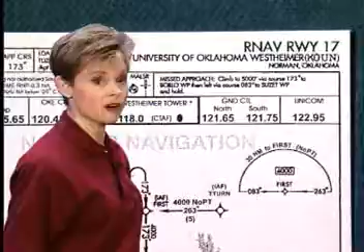Let's take a look at the plan view of a sample RNAV chart found in the AIM. This is the RNAV Runway 17 approach to Norman, Oklahoma. Notice it uses the classic T shape you've already seen on a GPS approach. By the way, the FAA will eventually convert GPS approaches to this same RNAV format. RNAV stands for Area Navigation, and of course GPS fits that category to a T.

The key to this approach is that it utilizes a concept the FAA calls Terminal Arrival Areas, or TAAs. When you have the capability of going directly to any point on the globe while you're IFR in the clouds, you need something to tell you how high to be so you don't hit anything attached to the Earth. That's where the TAA comes in. A TAA divides up the world in the vicinity of an RNAV approach into 3 areas and gives you a minimum altitude to use while going through each area. It's so simple that even I can understand it.

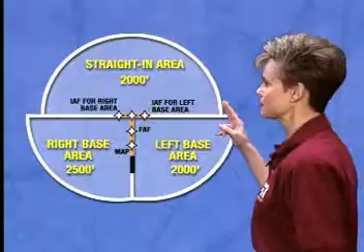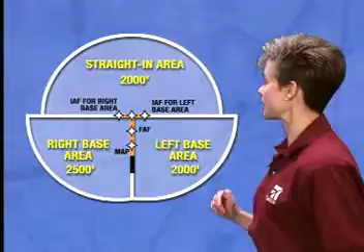Let's take a look at the TAA basic design. Surrounding the approach T, you see a semicircle coming off the T crossbar on the side opposite the long leg. It's called the straight-in area. Then, on either side of the T long leg, you see 2 quarter circles: the one to the left labeled right base area, and the one to the right labeled left base area. They correspond to base legs in a landing pattern. Each of these areas shows a minimum altitude.

As always, you will find variations to this basic setup. Some TAAs may be missing one of the base areas, or even both, leaving only the straight-in area. And the straight-in area might be opened up to cover all but a maximum of 120 degrees around the final approach course. If you come in from a direction not covered by a TAA area, such as down here, you'll have to fly the published course reversal unless you get radar vectors.

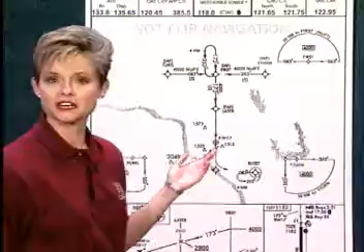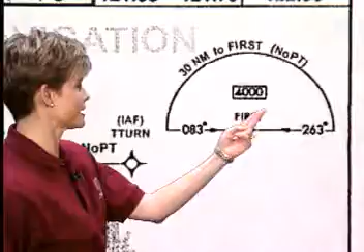You'll find TAAs tailored as necessary for local terrain and obstructions. Most in Kansas will be pretty standard. On the other hand, those at the foothills of the Rockies may not be. Notice how on this approach chart they show the TAAs as a semicircle and quarter circles out away from the clutter. And each shows the initial approach fix waypoint name you'll use when arriving in that area. And your altitude? Well, look, it's printed right here on your chart, 4,000 feet for this TAA.

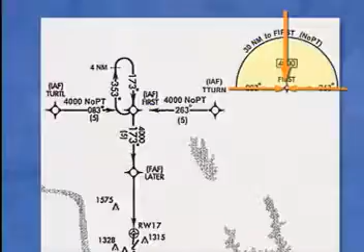When your approach includes TAAs, you're expected to go to the initial approach fix and fly the altitudes for the TAA appropriate for where you're coming from. If you're coming in from the north, anywhere from a bearing of 083 to 263 to first, you'd fly directly to FIRST and then to LATER. If you're approaching from the southeast on a bearing of 353, around to a bearing of 263 to first, you'd fly directly to TTURN, then to FIRST, and then to LATER.

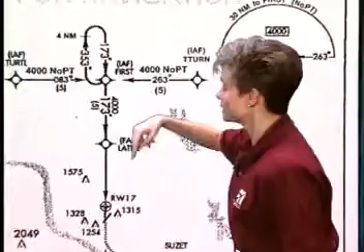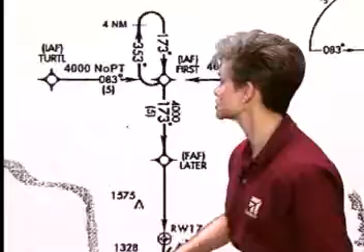On the other hand, you could be arriving from the southwest on a bearing of 353, around to a bearing of 083 to first. In that case, as soon as you cross the right base area boundary, which in this case is the 30 nautical mile arc from TURTL, or when ATC releases you within the area, you'll use the right base no procedure turn setup for the approach by flying to TURTL, FIRST, and LATER. Is that simple or what? Notice you never have to fly a turnaround procedure such as a procedure turn. You always just go to TURTL or TTURN when arriving from the base areas.

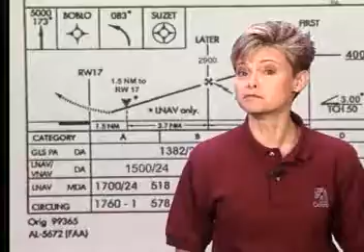But what if you really want to fly the holding pattern for practice or to lose altitude? Then tell ATC, since they're expecting you to fly the approach without the course reversal. In that case, you'll go to first and fly the pattern as published. Generally, the area covered by the TAAs for an approach includes one or more airways, so you don't need feeder routes. But if all the airways lie outside the TAAs, the chart will include feeders aligned with the appropriate IAFs of the T. Now that we understand how to get started on this approach, let's drop down to the minimums section to see how low we can go.

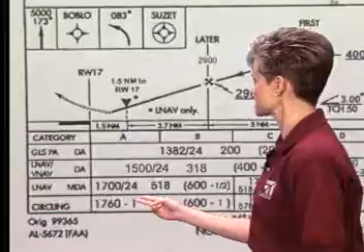The answer to how low you can go depends on how your aircraft is equipped. Notice that the minimums for Category A aircraft range from 1,760 feet down to 1,382 feet. Let's start at the bottom of the minimum section and work our way up.

Using plain old GPS to shoot the approach and circling at the end lets you get down to 1,760 feet. But if you go up to the next level, labeled LNAV, you can go down to 1,700 feet. LNAV stands for lateral navigation. This is the minimums level you'd use if you were equipped with a plain vanilla GPS like the KLN-89B and making a straight-in approach.

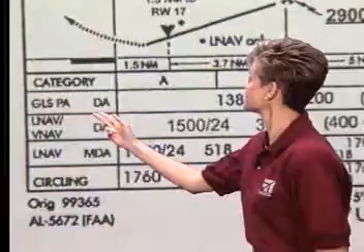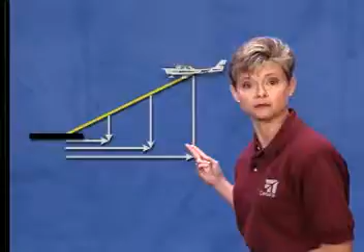To move up to the next level and get minimums of 1,500 feet, you have to have LNAV VNAV. VNAV stands for vertical navigation. What that means is you have to have a navigation system that internally computes a glide path for you based on how far you are from the runway. Some fancy navigation systems you see in jets have this capability. It won't be long until we see this capability in piston airplanes.

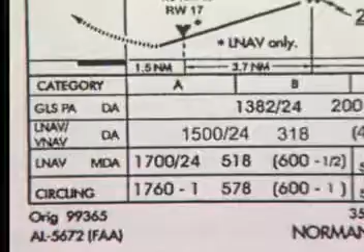Now, how do we move up to the next level, labeled GLS-PA, with even lower minimums? To do that, we'll need VNAV capability with even more accurate GPS than we have now. Remember earlier I called the magnificent KLN-89B a plain vanilla GPS? Well, that's because we will soon have equipment that will let us do much better.

As you probably have noticed, all of the GPS approaches we've talked about so far have been non-precision approaches. Right now, GPS isn't accurate enough for precision approaches. It only gives accuracy to within 50 to 100 feet, while an ILS has accuracy to within 15 to 30 feet. But there is a way to improve the accuracy of GPS.

That is by having a transmitter that knows where it is located send out correction signals to the GPS units in aircraft. One system to do this is the Wide Area Augmentation System, or WAAS. WAAS is a network of over 20 ground stations around the U.S. which will receive GPS satellite transmissions. Since each ground station is in a known location, the locations derived from the satellite transmissions can be compared to this known location, and any errors can be identified.

This error information will be processed and sent to satellites in stationary Earth orbits. These satellites will then broadcast error-correcting information to the GPS receivers in aircraft. Now, that all sounds pretty complicated, but it should be unnoticeable to the users of GPS. What will be noticeable, however, is that this system will be accurate to nearly ILS tolerances on approaches.

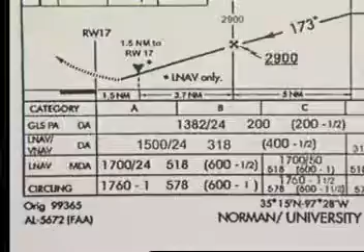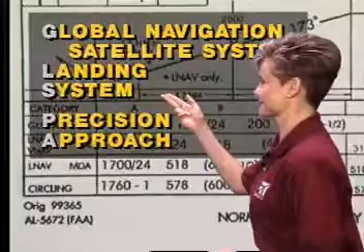So with that kind of capability, we will be able to step right up to the GLS-PA level. GLS stands for, are you ready for this? This is complicated: Global Navigation Satellite System Landing System. The PA stands for Precision Approach.

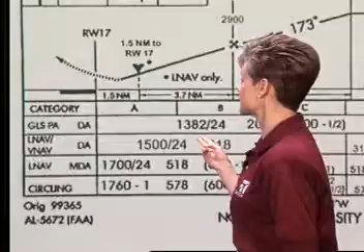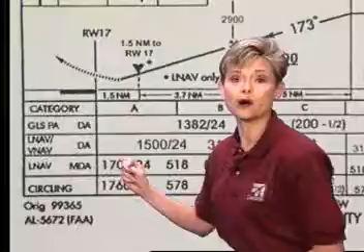With that, we get the lowest minimums of all, in this case 1,382 feet. Notice that the GLS-PA and LNAV-VNAV are labeled DA for Decision Altitude rather than MDA. That's because with the GLS-PA and LNAV-VNAV, you are following a glide path, whereas with the LNAV, you are making your descent on your own.

Now let's go to the top of the chart and take a look at some of the notes. The first note says circling not authorized southeast of runway 321. The next note reads DME/DME RNP 0.3 NA. NA, as you know, means not authorized.

DME refers to a navigation system that determines its location by tuning in more than one VORTAC or VOR DME and figuring its position based on how far it is from each. The problem is when you get lower, the system might not be able to receive information from enough DMEs to get an accurate position. That's probably why that system is not authorized in this case.

The RNP 0.3 refers to the accuracy level of the system. RNP stands for Required Navigation Performance, and the 0.3 tells you that the system would be within 0.3 of a mile of where it says it is 95% of the time. That's the accuracy level you need for approaches.

The next note says Baro VNAV not authorized below -20 degrees Celsius, which is -4 degrees Fahrenheit. Baro VNAV stands for Barometric VNAV. VNAV uses the barometric altimeter to know how high the airplane is in relation to the computed glide path. As you know, the altimeter does not give you the proper terrain clearance in extremely cold weather, so this system is not authorized in extremely cold weather.

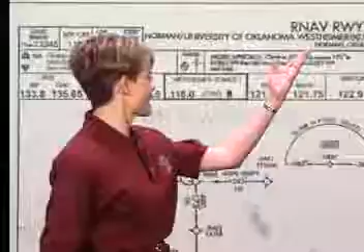So there you have it, the RNAV approach. One more handy way into the airport of your choice with a lot of promise for the future.